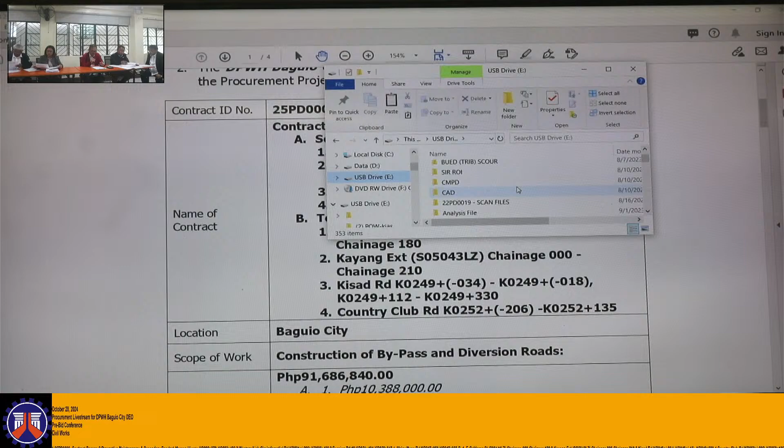So to start, this Baguio City District Engineering Office, or this office, now invites bids for the procurement project.

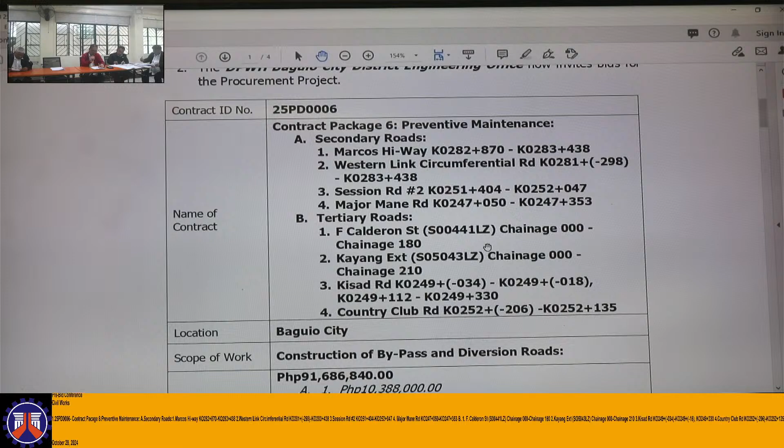This is contract ID number 25PD0006. The name of the contract is Contract Package 6, Preventive Maintenance for secondary roads. Number 1, Marcos Highway, KO282 plus 870 to KO283 plus 438. The approved budget for the contract for this road section is 10,388,000.

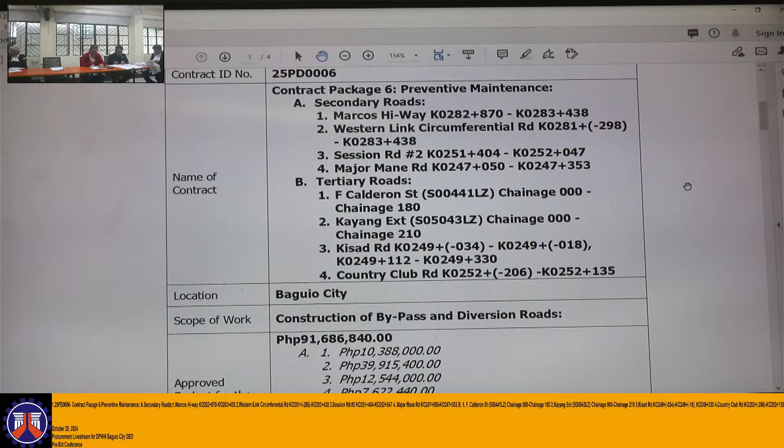Number 2 is Western Link Circumferential Road, KO281 plus negative 298 to KO283 plus 438. The approved budget for the contract for this road section is 39,915,400. For number 3, Session Road number 2, KO251 plus 404 to KO252 plus 047. The approved budget for the contract for this road section is 12,544,000. Number 4 is Major Mane Road, KO247 plus 050 to KO247 plus 353.

The approved budget for the contract for this road section is 7,622,440 pesos. And B, for tertiary roads, number 1 is F. Calderon Street, S00441LZ, Chainage 000 to Chainage 180. The approved budget for the contract is 4,704,000.

Number 2 is Kayang Extension, S05043LZ, Chainage 000 to Chainage 210. The approved budget for the contract for this road section is 5,537,000. The Kisad Road, KO249 plus negative 034 to KO249 plus negative 18. The approved budget for the contract for this road section is 5,978,000.

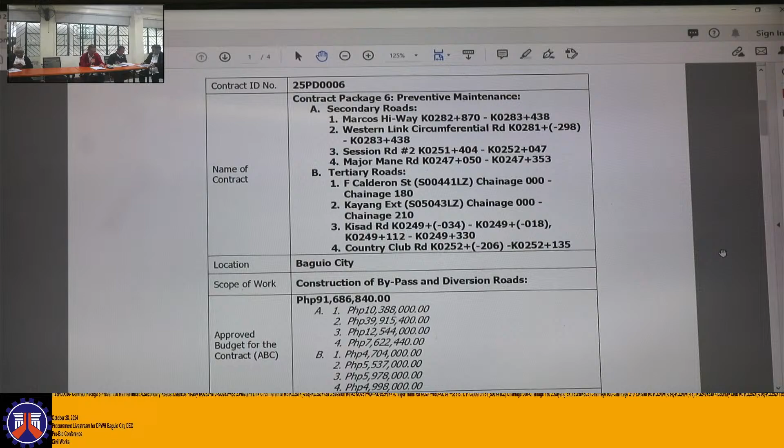Number 4 is Country Club Road, KO252 plus negative 206 to KO252 plus 135. The approved budget for the contract is 4,998,000. For this contract package, the total approved budget for the contract, the ABC, is 91,686,840. The contract duration is 300 calendar days, and the cost of bid documents is 50,000.

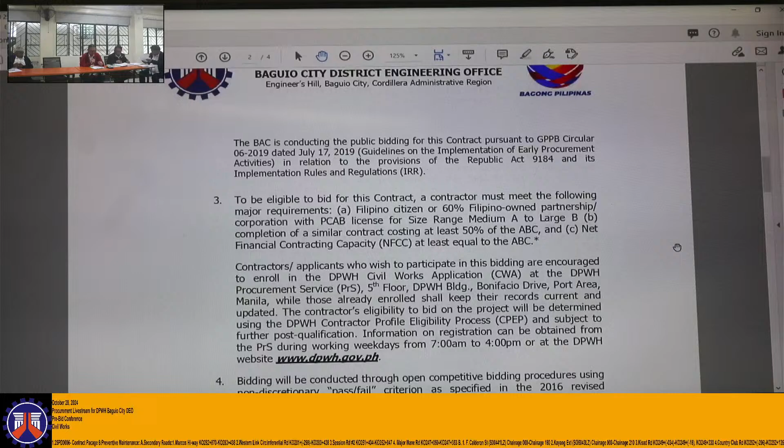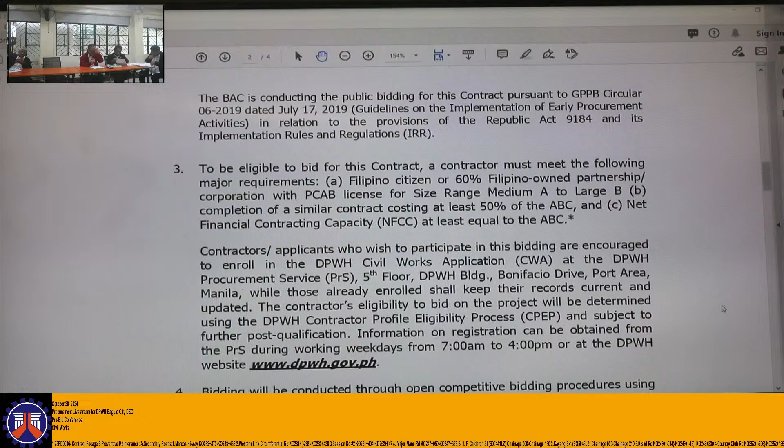So our office now is conducting the public bidding for this contract pursuant to GPPB Circular 06-2019, dated July 17, 2019, and guidelines on the implementation of early procurement activities in relation to the provisions of Republic Act 9184 and its implementing rules and regulations. So, to be eligible to bid, the contractor must meet the following major requirements.

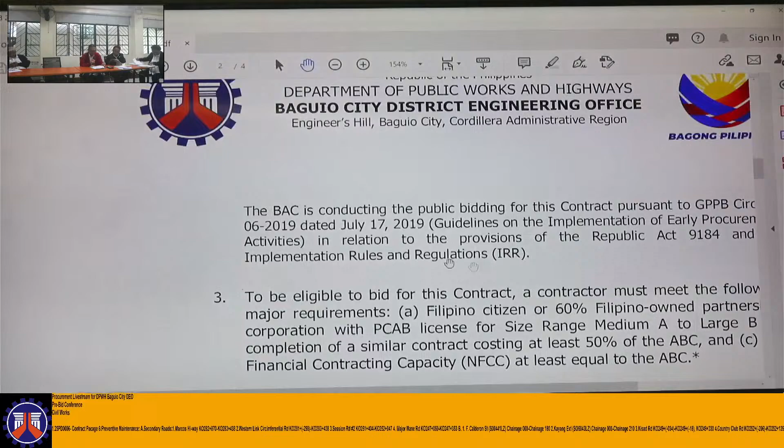He or she must be a Filipino citizen, or a 60% Filipino-owned partnership or corporation, with a license ranging from Medium A to Large B. A completion of a similar contract costing at least 50% of the ABC, and net financial contracting capacity at least equal to the ABC. Contractors or applicants who wish to participate in this bidding are encouraged to enroll in the DPWH Civil Works application.

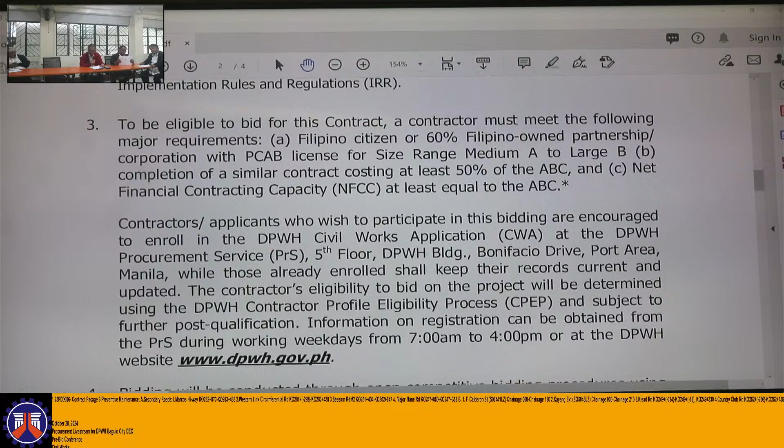At the DPWH Procurement Service, 5th floor, DPWH Building, Bonifacio Drive, Port Area, Manila, those already enrolled shall keep their records current and updated. Contractors' eligibility to bid on the project will be determined using the DPWH contractor profile eligibility process and subject to further post-qualification. Information on registration can be obtained from the Procurement Service during working weekdays from 7 a.m. to 4 p.m.

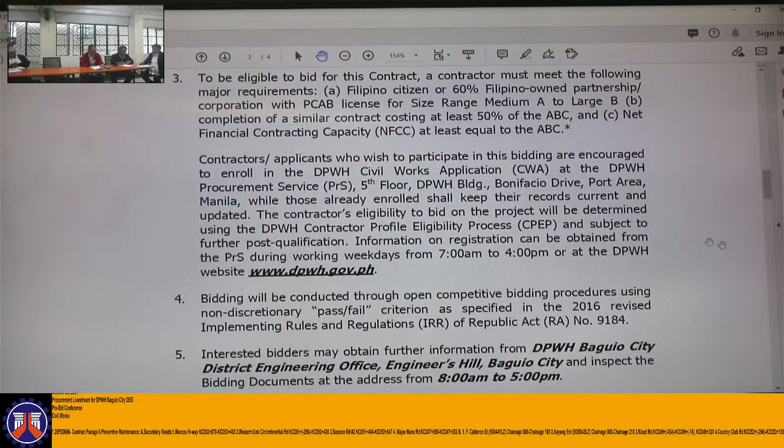Or at the DPWH website, www.dpwh.gov.ph. So the bidding will be conducted through open competitive bidding procedures, using non-discretionary pass-fail criterion as specified in the 2016 Revised Implementing Rules and Regulations of Republic Act Number 9184.

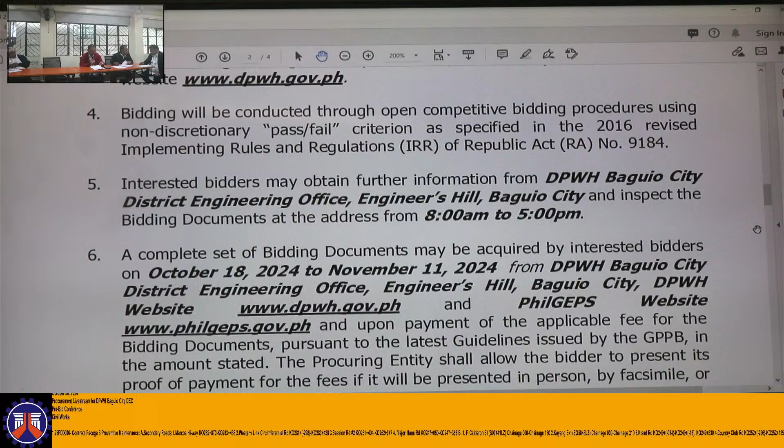For those interested bidders, they may obtain further information from DPWH Baguio City District Engineering Office, Engineers Hill, Baguio City. A complete set of bidding documents may be acquired by interested bidders. This was started last October 18, 2024, up to November 11, 2024, here from DPWH Baguio City District Engineering Office, Engineers Hill, Baguio City.

DPWH website www.dpwh.gov.ph and PhilGEPS website www.philgeps.gov.ph, upon payment of the applicable fee for the bidding documents pursuant to the latest guidelines issued by the GPPB in the amount stated. The procuring entity shall allow the bidder to present its proof of payment for the fees if it will be presented in person, by facsimile, or through electronic means.

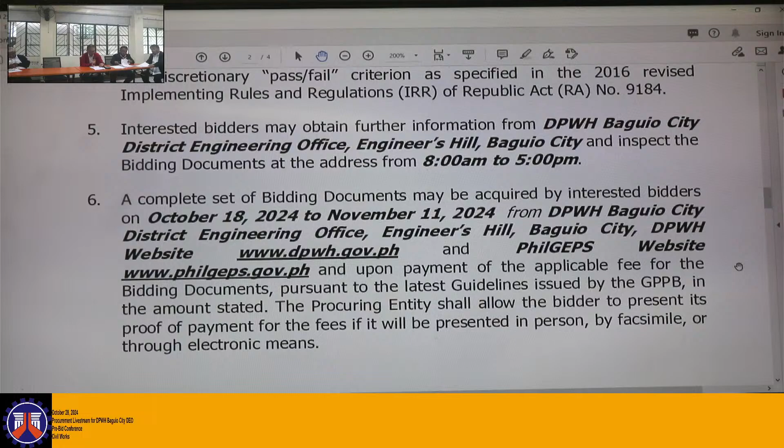Now we are doing the pre-bid conference. It's supposed to be at 10 a.m. this morning, but because of some meeting with the COA, we moved it to 2 p.m., this afternoon, here at the Baguio City District Engineering Office Conference Hall or Multipurpose Hall, or also with video conferencing or webcasting via Facebook Live.

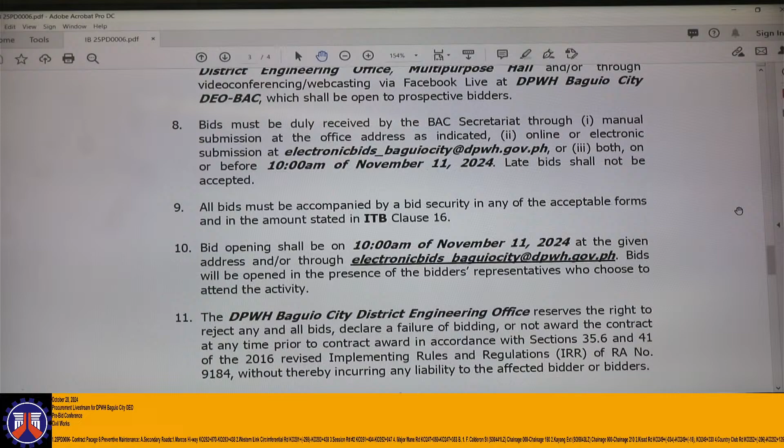The bids must be duly received by the BAC Secretariat through manual submission, online or electronic submission at electronicbids_baguiocity@dpwh.gov.ph, or both, on or before 10 a.m. of November 11, 2024. Late bids shall not be accepted. All bids must be accompanied by a bid security in any of the acceptable forms and in the amount stated in ITB Clause 16.

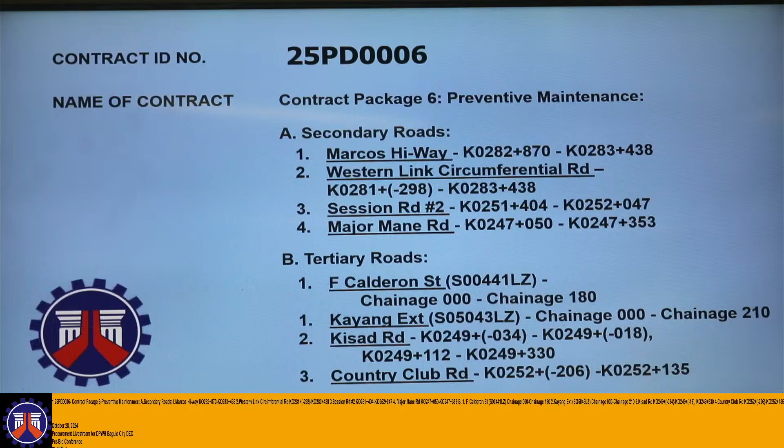The contract ID number is 25PD0006, with the name of the contract as Contract Package 6: Preventive Maintenance for Secondary Roads and Tertiary Roads. Under secondary roads, we have the following: Marcos Highway, Western Link Circumferential Road, Session Road 2, and Major Mane Road. And for tertiary roads, we have F. Calderon Street, Kayang Extension, Kisad Road, and Country Club Road.

We have the scope of work for the contract package, which is set to be completed within 300 calendar days. The approved budget for the contract is 91,686,840 pesos.

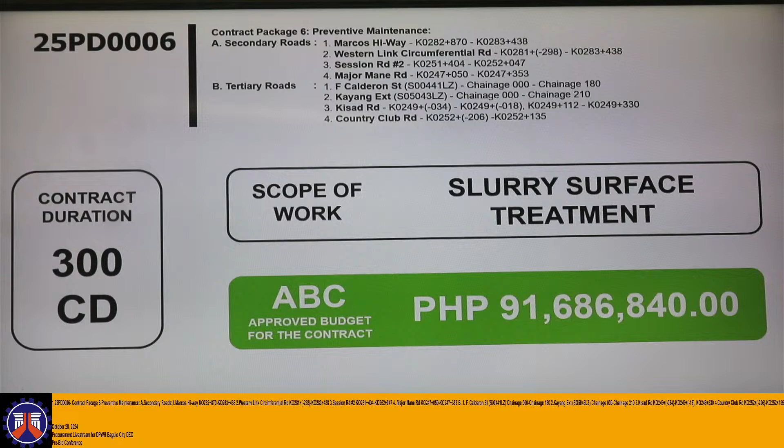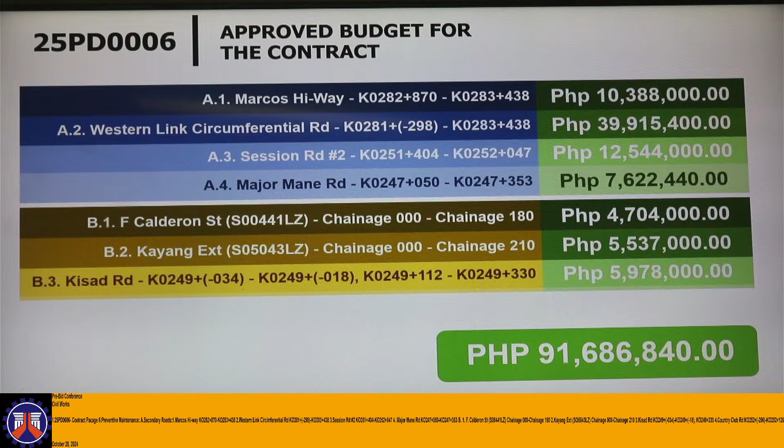The breakdown for the approved budget for the contract is for Marcos Highway, Western Link Circumferential Road, Session Road number 2, Major Mane Road, and for the tertiary roads: F. Calderon Street, Kayang Extension, Kisad Road, and Country Club Road, for a total of 91,686,840 pesos.

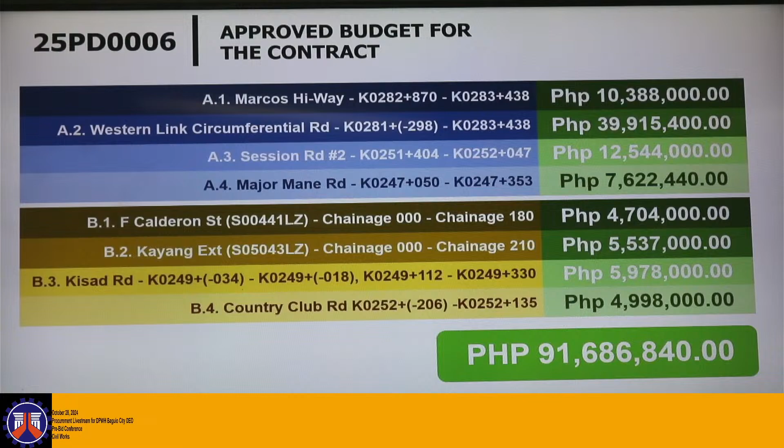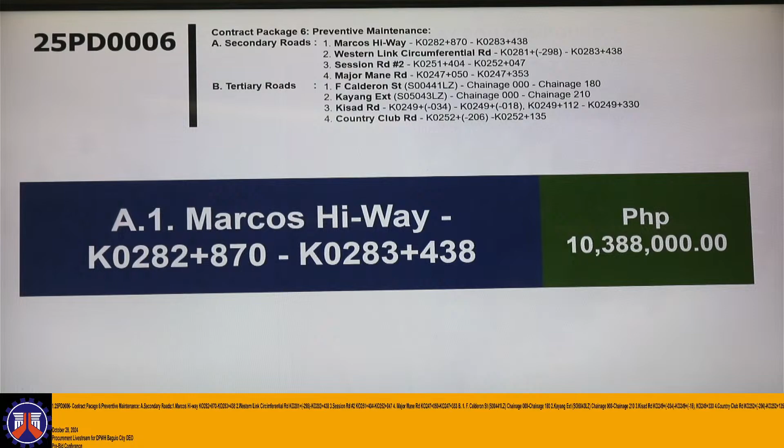The first project to be discussed will be Marcos Highway, with station limits at K0282 plus 870 to K0283 plus 438, with a project amount of 10,388,000. We have here the coordination with Barangay BGH Compound with Ma'am Elaine Leonor C. Rivera, the Barangay Captain, and at Barangay Ferdinand with Punong Barangay Abdul Sader Gunting.

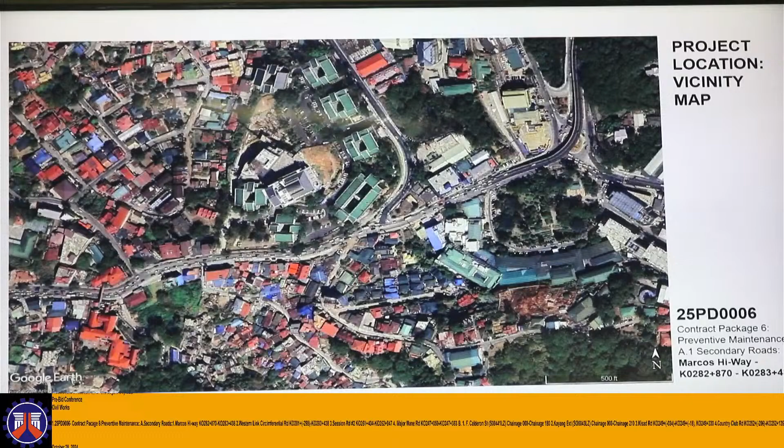We also have here the coordination with Barangay Imelda Marcos. Here is the vicinity map of the project. It will start at the nearest landmark, Santa Catalina Spirituality Center, at the start; at the middle station we have Europa Condominiums; and then at the end station we have BGH Compound.

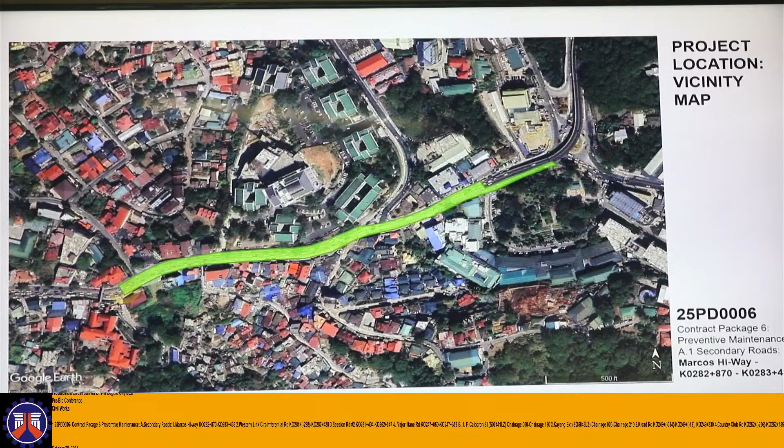Here is the condition at the start of the project. And this is the end of the project.

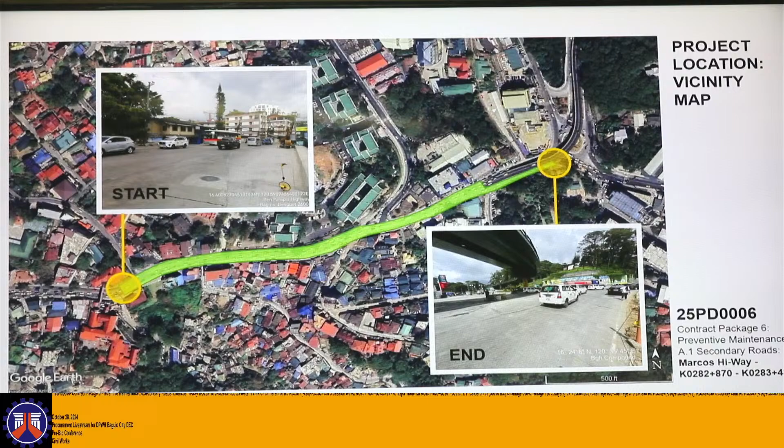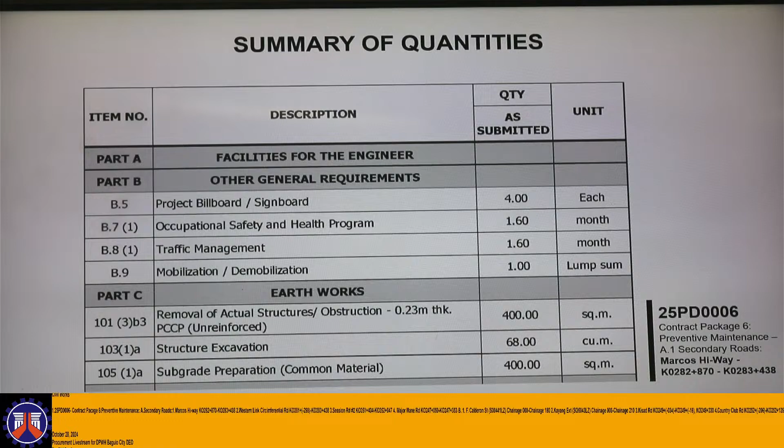We have on screen the summary of quantities. Under other general requirements, we have project billboard, occupational safety and health program, traffic management and mobilization or demobilization. Under earthworks, we have removal of actual structures or the actual PCCP, existing PCCP, and structure excavation, subgrade preparation, aggregate sub-base course, and Portland cement concrete pavement for the proposed selective reblocking. Under surface course, we have emulsified asphalt and slurry surface treatment for the asphalt overlay. Under miscellaneous structures, we have concrete covers, which will be installed after the selective reblocking, and reflectorized thermoplastic pavement markings, white and yellow.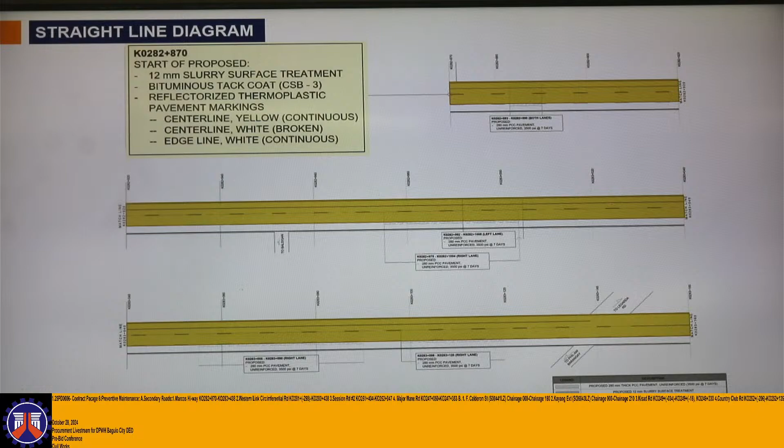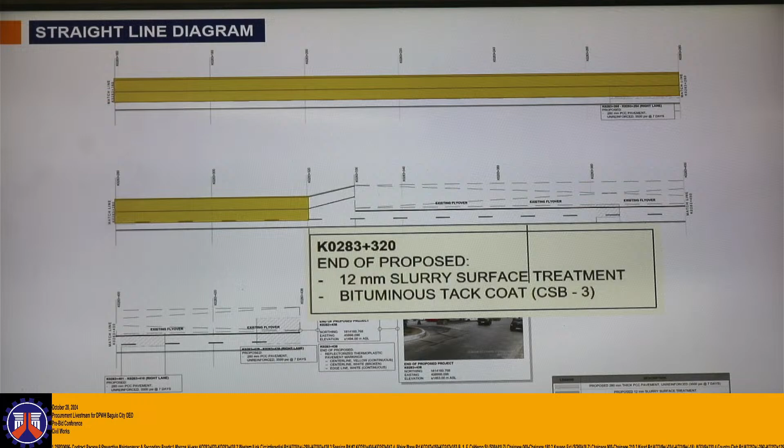As you can see on screen, not all parts of the straight line diagram are highlighted. The new PCCP at the right side will not be overlaid with slurry surface treatment. The asphalt overlay will continue up to station K0283 plus 320, where this will be the end of the proposed 12 mm slurry surface treatment and bituminous tack coat. But for the reflectorized thermoplastic pavement markings, it will continue up to K0283 plus 438, and this will also be the end of the proposed project.

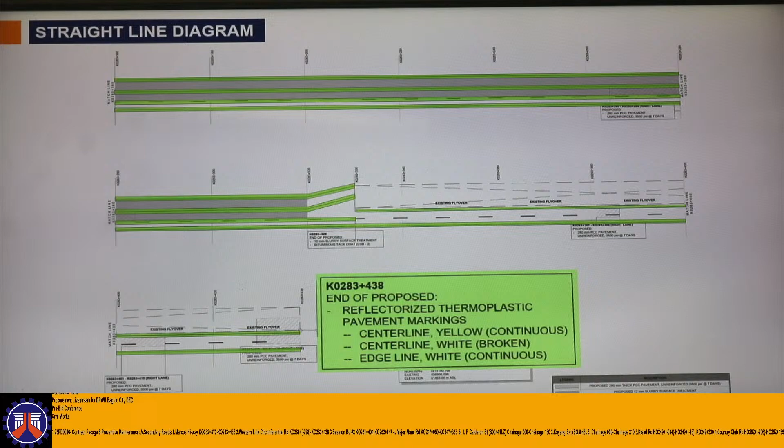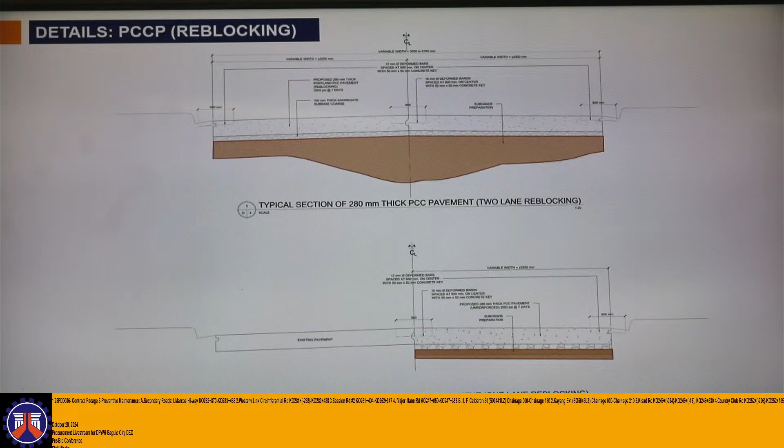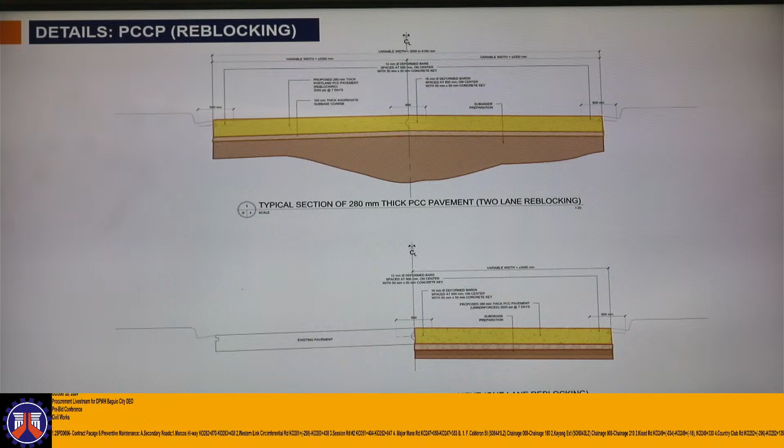We have on screen the details of the PCCP reblocking for 2-lane reblocking and 1-lane reblocking. In both cases, we will start with subgrade preparation, followed by the 100 mm thick aggregate sub-base course, and the 280 mm thick Portland cement concrete pavement.

As mentioned earlier, not all parts of the pavement will be overlaid with asphalt. So if you are from Tuba going to Baguio Central Business District, we have here the existing old PCC pavement, and at the right side, we have the existing new pavement, which was constructed this year or last year due to the widening. So for the 12 mm thick slurry surface treatment, it will only be applied on the existing old pavement.

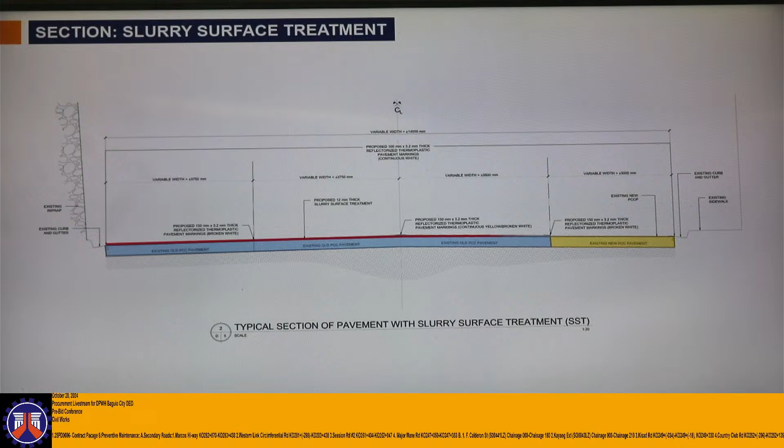So that would be all for Marcos Highway. We move on to another project under secondary roads, which is Session Road number 2, with station limits from K0251 plus 404 to K0252 plus 047, with a project amount of 12,544,000.

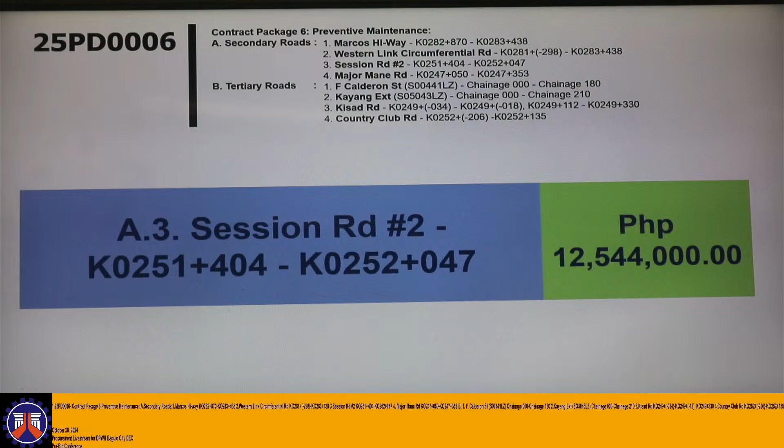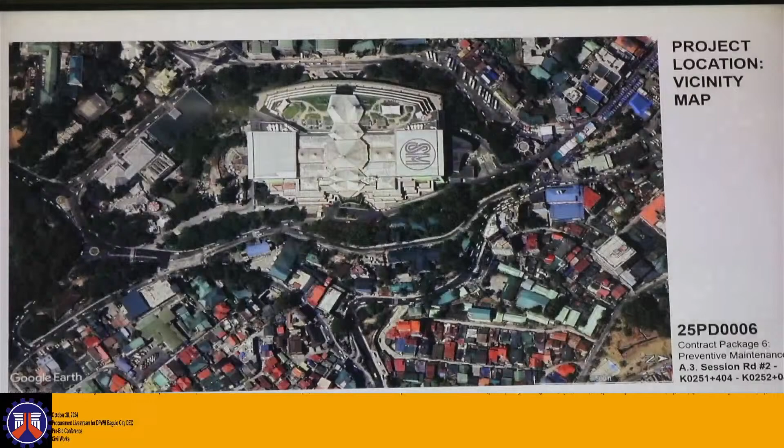Here's the vicinity map of the project, which will start at K0251 plus 404 and end at K0252 plus 047. The nearest landmark at the start is the O'Mai Khan restaurant, at the middle station we have just below SM City Baguio, and at the end station we have Upper Session Road Rotonda.

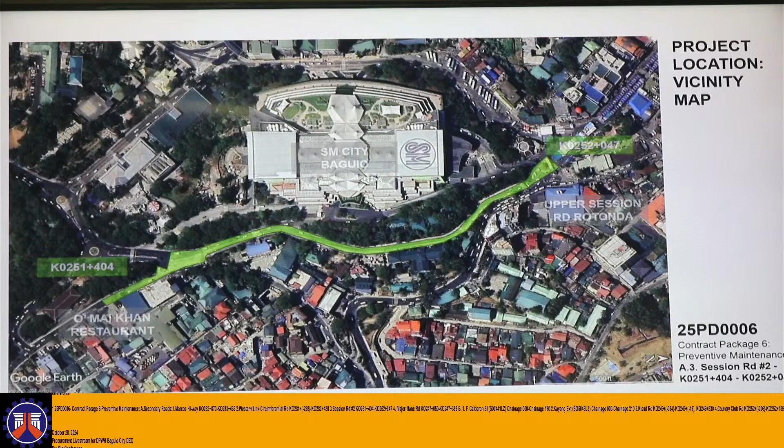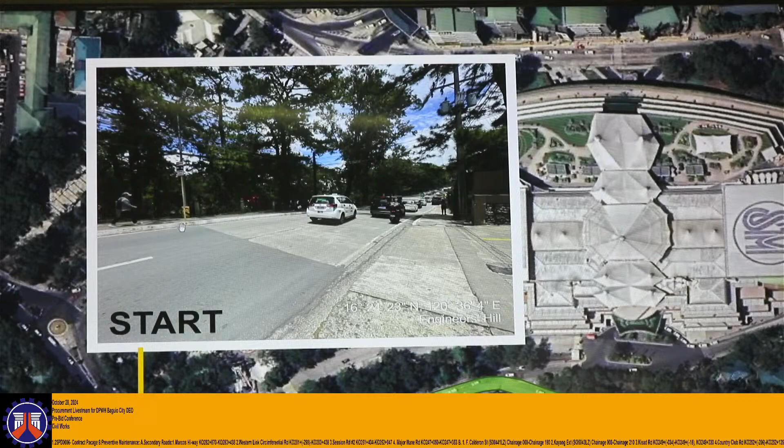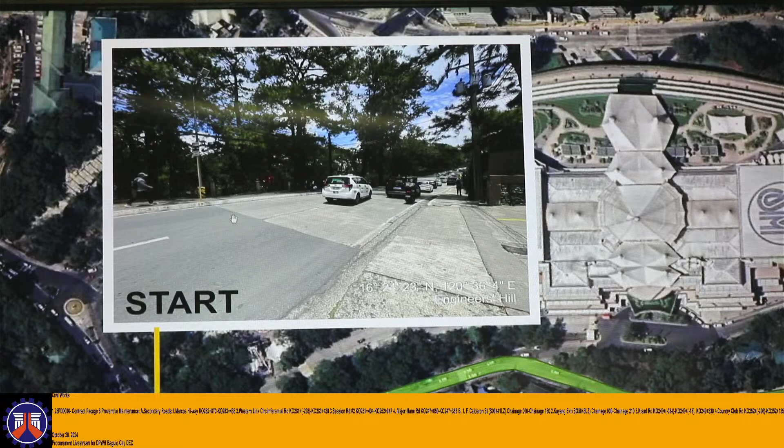So this is the existing condition at the start of the project. As you can see, this was the previous project where the asphalt was overlaid. So this is where the project will start.

And at the end station, we have here Upper Session Road Rotonda.

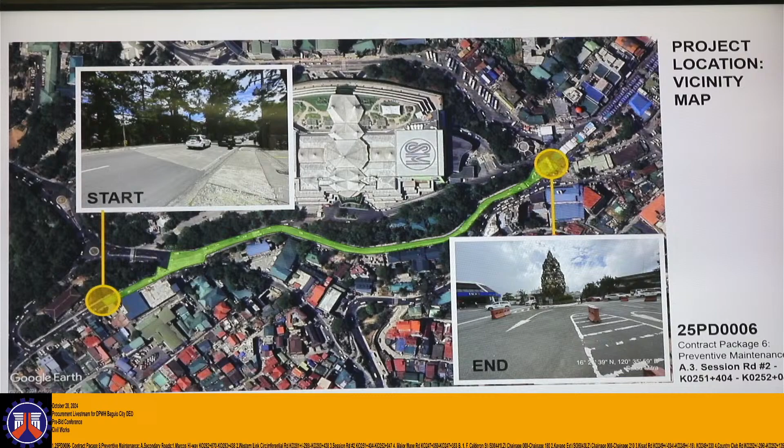We have here the summary of quantities. Under other general requirements, we have project billboard, occupational safety, traffic management, and mobilization. Under earthwork, sub-base and base course, and surface course, we have the items for PCCP selective reblocking. Also, under surface course, we have emulsified asphalt and slurry surface treatment. For the miscellaneous structures, we have concrete covers and the reflectorized thermoplastic pavement markings, white and yellow.

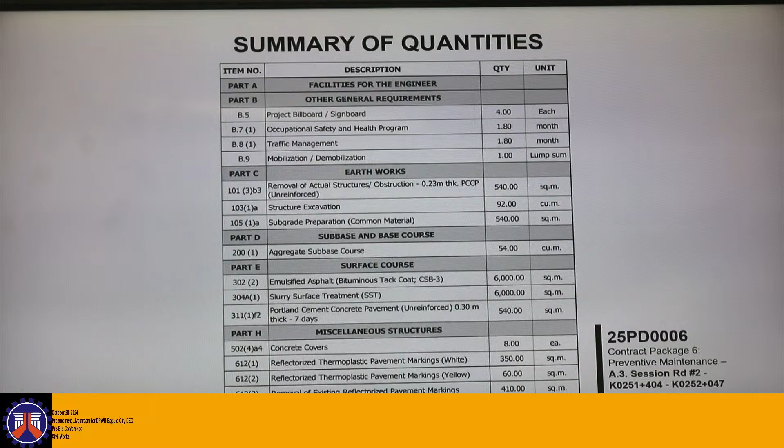Here's the straight line diagram of the project. As mentioned earlier, it will start in front of O'Mai Khan Restaurant and will continue up to Upper Session Road Rotonda.

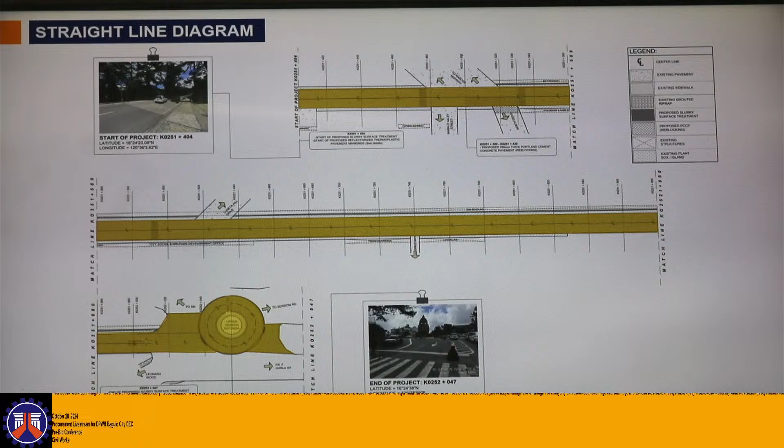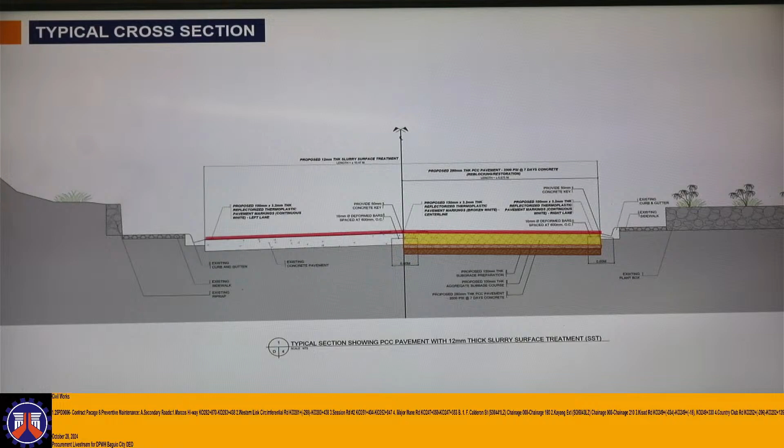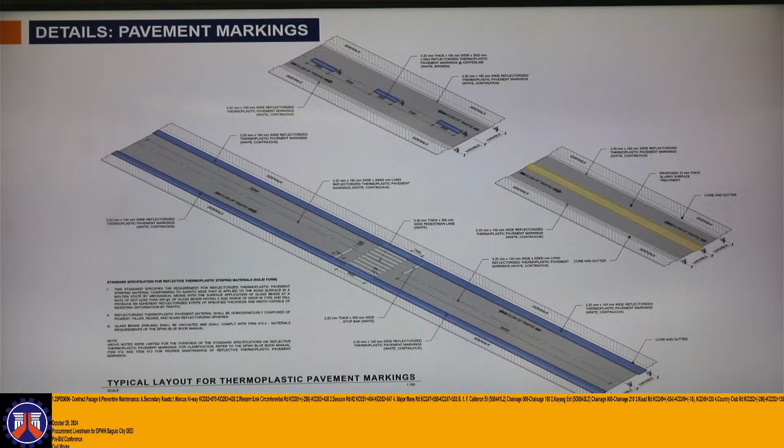Here are the pavement marking details. For center line, we have the broken white lines or yellow continuous line. For edge lines, we have solid continuous white line. We also included the pedestrian lanes, and we also have here the traffic management details.

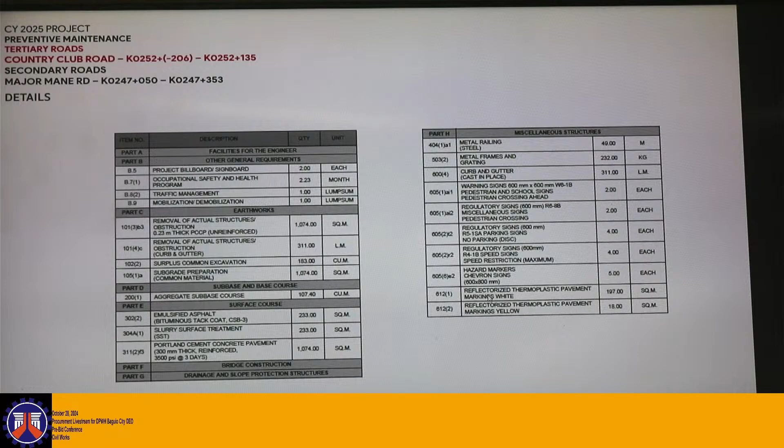For the summary of quantities for tertiary roads, Country Club Road, we have project billboard, occupational safety and health program, traffic management, removal of actual structures and obstruction, curb and gutter, surplus common excavation, subgrade preparation, aggregate sub-base course, emulsified asphalt and slurry surface treatment, and Portland cement concrete pavement. We also have metal railings, metal frames and grating, curb and gutter, various road signs, and reflectorized thermoplastic pavement markings white and yellow.

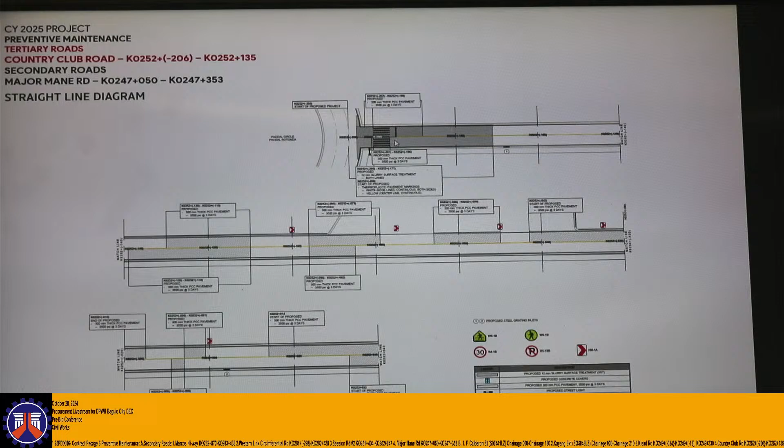This is the straight line diagram for the proposed project, starting from Pacdal Circle Rotonda until the intersection going to Outlook Drive. As you can see, we have selective reblocking and thermoplastic pavement markings, white and yellow, starting from the Rotonda until the end of the proposed project.

These are the details for the thermoplastic pavement markings, white and yellow. Also included is the details for the zebra markings.

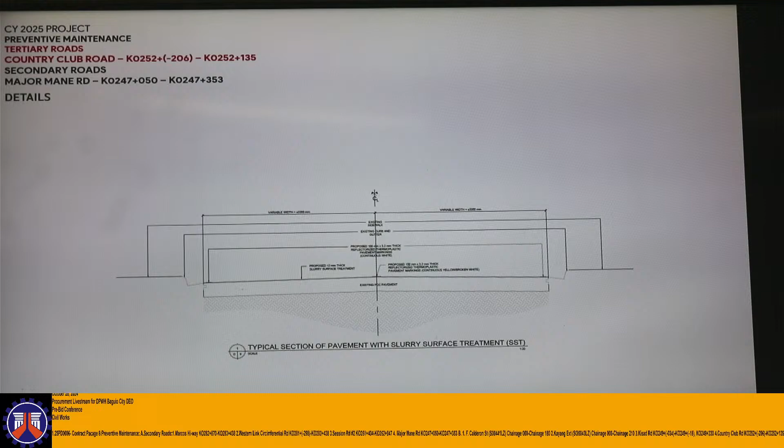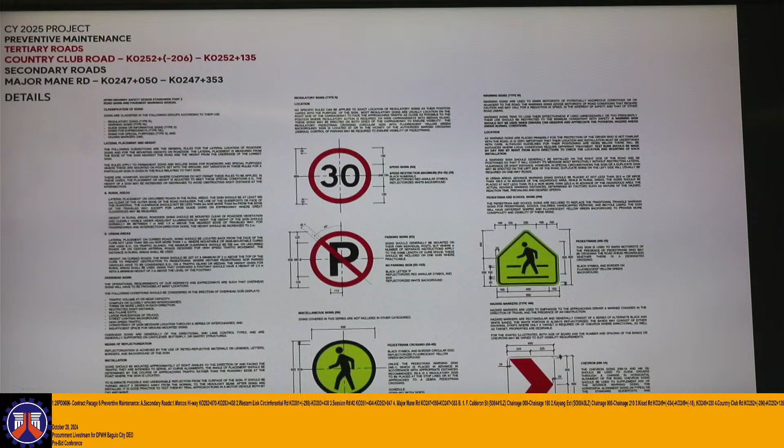These are the typical sections for the 300 mm PCC pavement for 2 lanes and single lane reblocking. This is the typical section for pavement with slurry surface treatment. These are the proposed road signs to be installed in the area, along with the road sign details and railings details.

That's all for Country Club Road, and let's proceed to preventive maintenance of secondary roads, Major Mane Road. This is the summary of quantities for the proposed project.

Occupational safety and health program, traffic management, emulsified asphalt and slurry surface treatment, various warning signs, reflectorized thermoplastic pavement markings white and yellow, project billboard, removal of actual structures, PCC pavement, and curb and gutter, surplus common excavation, subgrade preparation, common material, aggregate sub-base course, Portland cement concrete pavement, concrete covers, metal frames and grating, and curb and gutter.

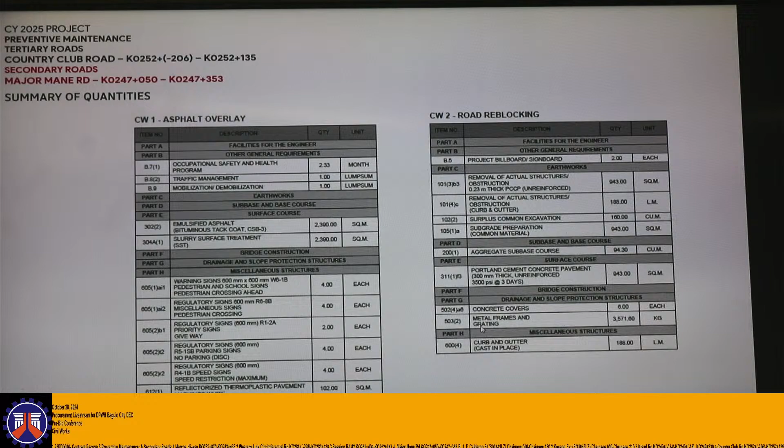We also have proposed thermoplastic pavement markings from start to end. We also provided different road signs in the area and replacement for the steel gratings and concrete covers.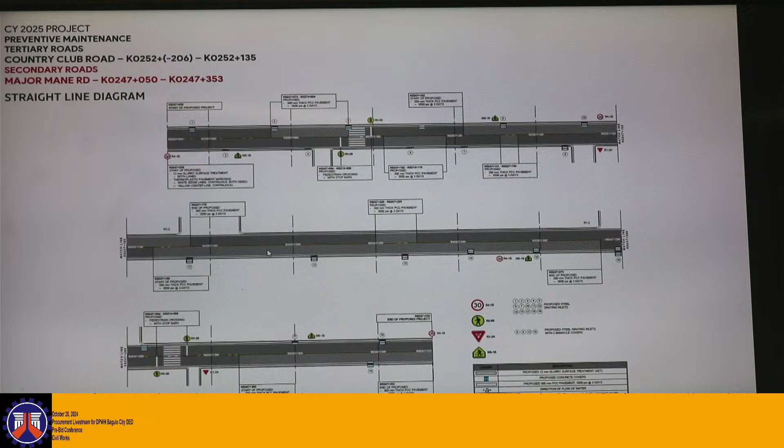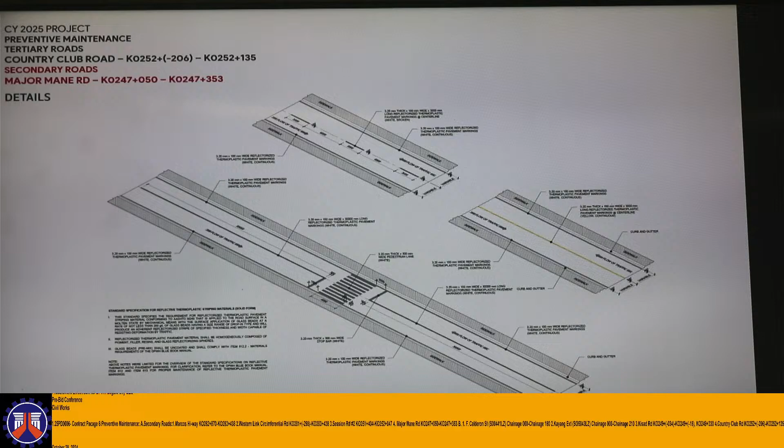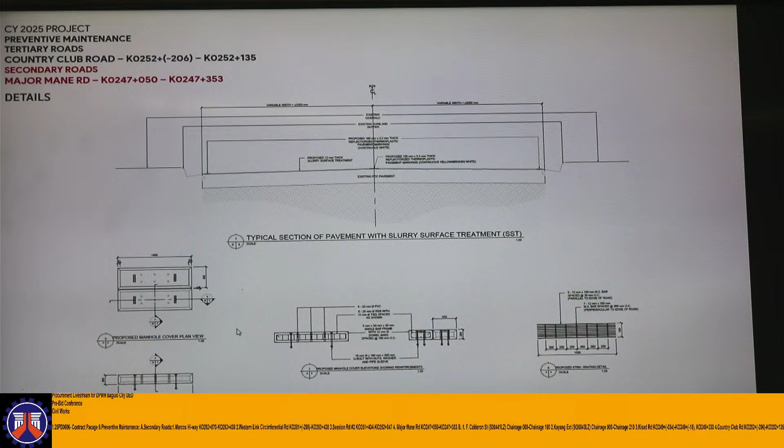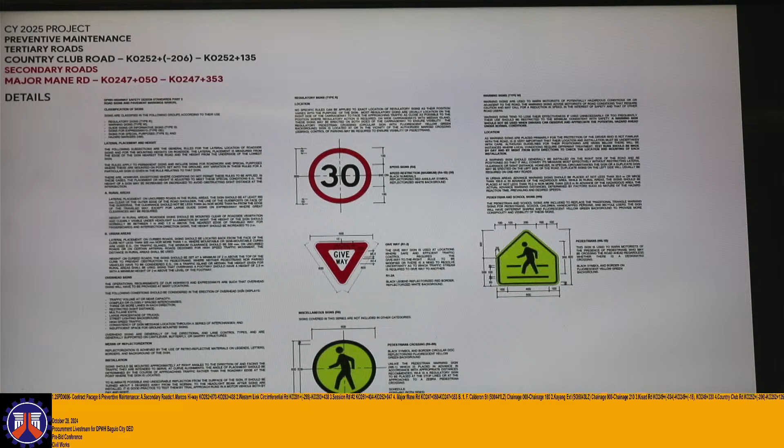Again, these are the details for the thermoplastic pavement markings white and yellow, for the typical section of 2-lane and 1-lane reblocking. Typical section of slurry surface treatment and details for the proposed concrete covers and proposed steel grating. These are the road signs proposed in the area, and this is the mounting details for the proposed road signs.

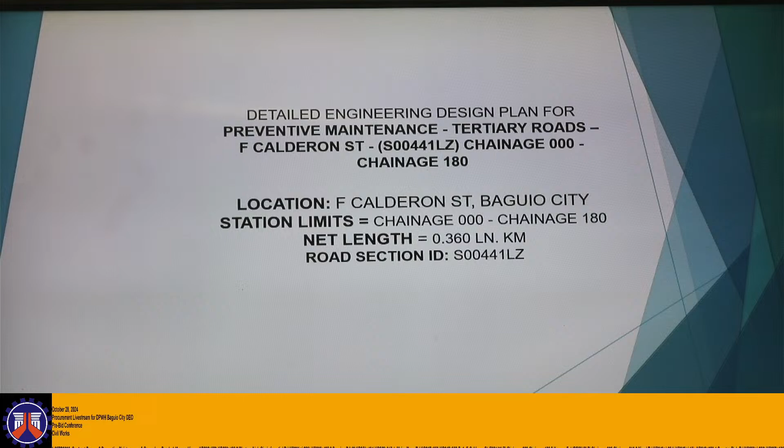Good morning, everyone. My name is Engineer Franz Daniel Cortez from Planning and Design Section, Baguio City District Engineering Office. Today, I will present to you the detailed preventive maintenance tertiary roads, F. Calderon Street, S00441LZ, from Chainage 0 to Chainage 180. The location of the project is F. Calderon Street, Baguio City, and the station limits is Chainage 0 to Chainage 180.